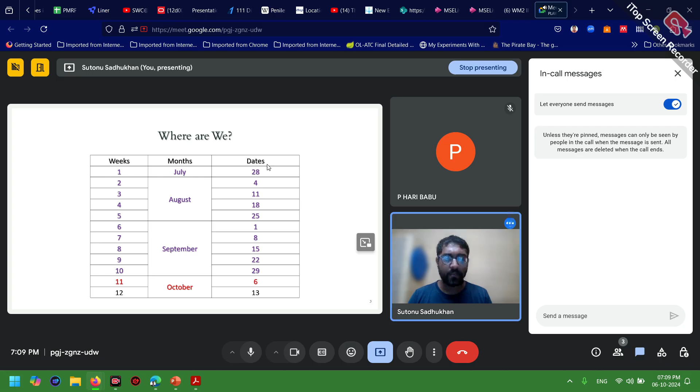So now, last class we actually showed you this quotation of a famous person who is a stand-up comedian of USA. His name is George Carlin. He says, 'Never underestimate the power of stupid people in a large group.'

Why did we say that? We actually used the quotation to clarify one statement which was given by an MP of the Hooghly parliamentary constituency of the state of West Bengal, which means member of parliament. She made a statement on the quantity of liquid water, but due to the ignorance of the people, they didn't have any idea that liquid property also should have mass, right? So not only does liquid have volume, liquid also has mass.

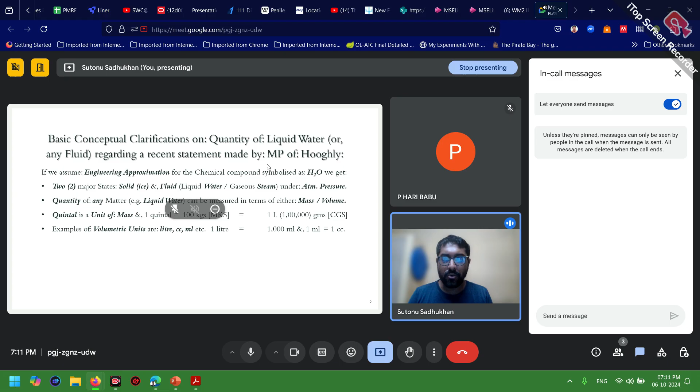Mass is a more fundamental property of any state of matter, irrespective of its state, be it a solid or a fluid. So any quantity of matter can be measured in terms of mass or volume. Not only is the quantity of liquid measured in liters, but it can also be measured in terms of mass. That was discussed in the last class. This is a very basic fundamental concept, but people have forgotten it. That's why they mocked that person, though whatever statements she made were perfectly scientifically correct.

So the volumetric units may be liter, cc or ml, but mass units can be expressed in terms of tons, kgs, grams or quintals. Quintal is a perfectly scientifically correct unit to measure the mass of any liquid like water, which is our case. We can also say that the density and volume of a fluid change with respect to temperature and pressure, but the mass remains constant irrespective of temperature and pressure.

So though the major market practice is to express the quantity in volumes, because the manufacturing company that manufactures the bottles keeps the bottle sizes constant, it is very convenient for them to express the quantity in liters. But that doesn't mean it cannot be measured in terms of mass, like the unit quintal.

We also clarified the difference between volumetric flow rates, which is nothing but Q, and static quantities like volume or mass. So the volumetric flow rate or mass flow rate, and the volume or mass, these two are rates, and the static properties are different. You can express the quantity in any one of them as per your convenience, as per your engineering application.

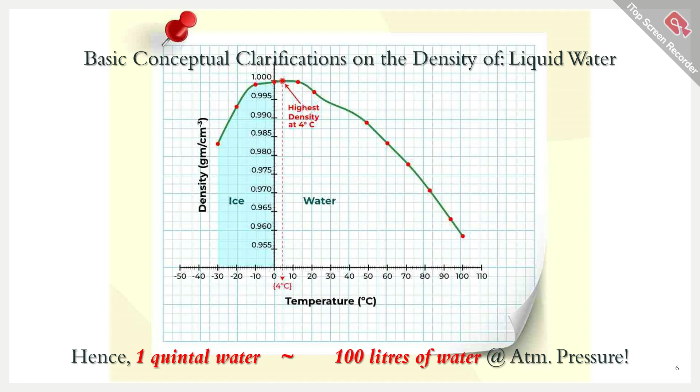Now, 1 quintal of water is equivalent to 100 liters of water at atmospheric pressure, that we have proved. And hence the statement made by that person was 100% scientifically correct, as we have shown.

So two problems were discussed in the previous class based on Manning's formula. Manning's formula requires a terminology written as m or R suffix H, called the hydraulic radius. It is a matter of pride for a teacher like me that students are very attentive in class, and in the last class, one student identified a major mistake in the slide for the calculation of hydraulic radius. One problem was perfectly fine, but the other had certain problems in the calculation of hydraulic radius.

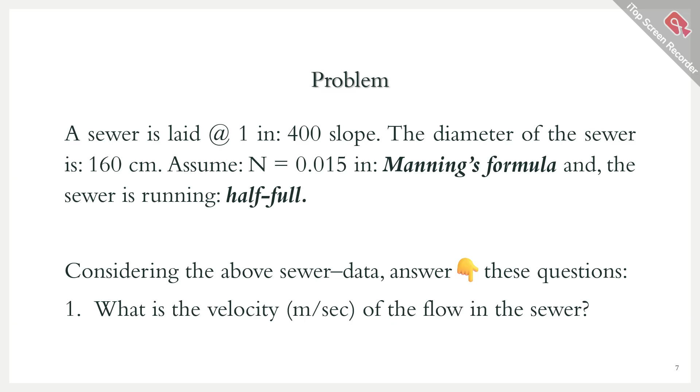So we will rediscuss that problem with the correct solution in today's class. Today's class starts with this problem discussed in the last class with certain mistakes. The problem was: a sewer is laid at a slope of 1 by 400. The diameter of the sewer is 160 centimeters. Assuming n, the coefficient in Manning's formula, is 0.015, and the sewer is running half full, considering the above sewer data, we had to answer: what is the velocity of flow in the sewer in meters per second?

So the data given is diameter is 160 centimeters, that means 1.6 meters, which implies radius is 0.8 meters, half of the diameter, and slope I was given as 1 by 400. Manning's formula is given as V equals m to the power 2 by 3 into root over of I, whole divided by capital N. Capital N's value is given as 0.015, which we put in the formula. Next, small m is the hydraulic radius, defined as the wetted area by wetted perimeter.

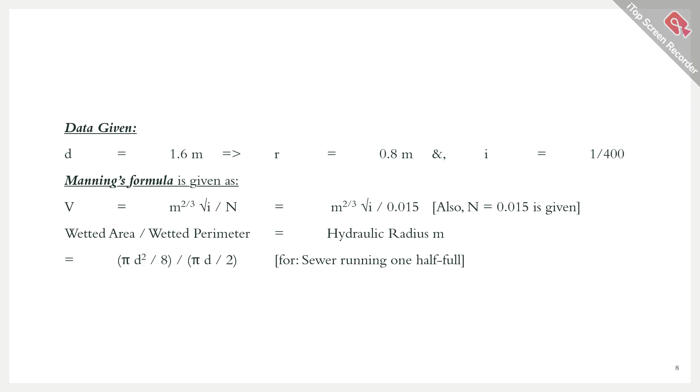So for a sewer running half full, we made a mistake by assuming the entire perimeter to measure the wetted perimeter. The value of wetted area was correct in our previous problem, which is pi r squared, that means pi d squared by 4, divided by 2, because the pipe is half full, so we take half of the entire cross-sectional area as the wetted area. That was correct, but in calculating wetted perimeter there was a problem, which one student correctly identified. When calculating the wetted perimeter, you should not consider the perimeter not in touch with the pipe. We had considered the diameter as part of the wetted perimeter, but it should not be, because the diameter, that is the top surface of the wetted area, does not touch the sewer pipe's internal wall.

Only half of the circular perimeter touches. That half is the perimeter where the water touches the inner wall of the pipe. But here the water does not touch the full inner wall, so we don't consider the diameter part. We only consider this half portion, which is 2 pi r by 2, that means pi r, or pi d by 2. So wetted area is pi d squared by 8, and wetted perimeter is pi d by 2.

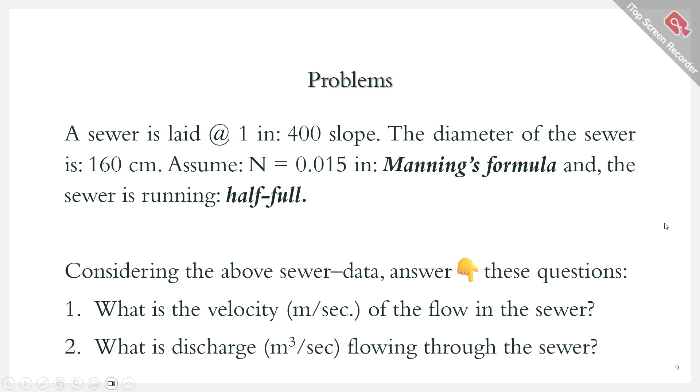Now, based on this velocity, we have to determine the discharge flowing through the sewer in meter cube per second unit. Meter cube per second means cubic unit. Okay, 1 cubic meter approximately equals 35.315 cubic feet per second.

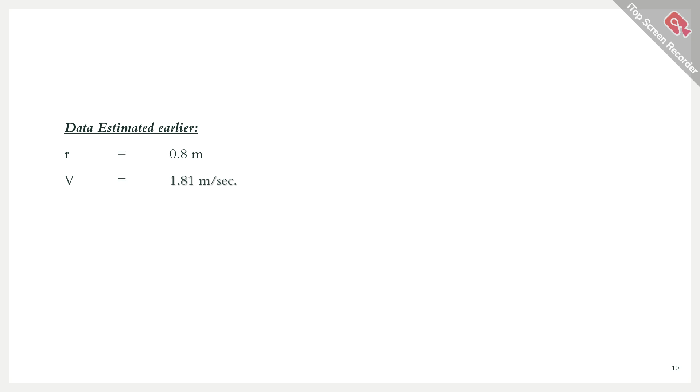Now, the data estimated earlier was small r radius equals 0.8 meter, and velocity was determined to be 1.81 meter per second from Manning's formula. Based on that, we get the solution where they've asked for the volumetric rate of discharge. If they asked about mass rate of discharge, we could get values in gram per second, kg per second, quintal per second, or tons per second, whichever asked. But they have not asked here, they only asked the volumetric rate of discharge, so that's why we are calculating it.

So Q, the volumetric discharge, is nothing but the wetted area into velocity. Wetted area means the portion of the area through which the fluid is flowing. In our case, it is half of the entire area, into the velocity with which the fluid is flowing perpendicular to the plane of paper. So wetted area is the total cross sectional area divided by 2, because it is half full, into velocity v that we just calculated.

So capital A means pi r square divided by 2, into v. Now pi into r square means 0.8 square means 0.64, divided by 2. This many meter square into velocity means 1.81 meter per second. After simplification, it will give you meter cube per second, that is cubic, which equals approximately 1.82 meter cube per second, the correct answer of the problem we discussed in our last class.

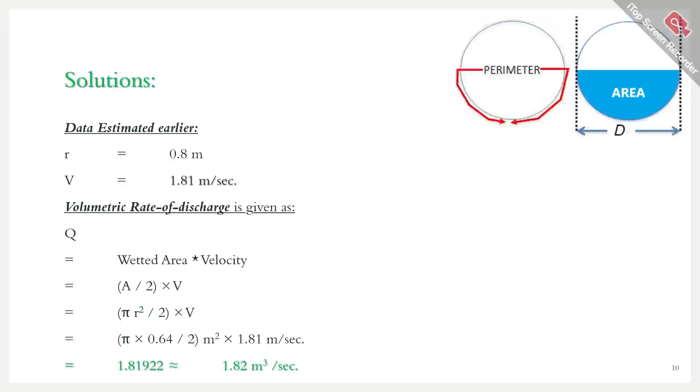Okay, two problems we discussed. The first problem had some issue because of the calculation of hydraulic radius, but the second problem was fine. So next today we'll start with an MSQ, multiple select question, so more than one option may or may not be correct.

So the potential of the maximum retention of rainfall through infiltration is independent of: characteristics of soil, vegetation and land usage; antecedent soil moisture conditions; quantity of rainfall; duration of rainfall. These are the four options, so one or more may be correct. Think and give the correct options, type it in the chat box. I'll wait for 1 minute.

Okay, so yeah, try this out. Okay, so not able to answer. Okay, we'll move on to the solution.

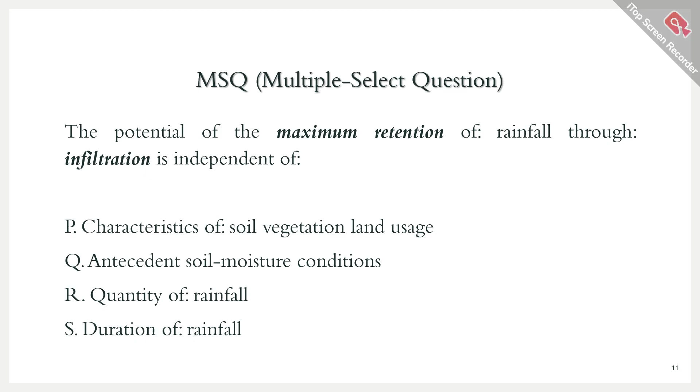Now the answers are option R and option S. So quantity of rainfall and duration of rainfall both actually do not affect the maximum retention of rainfall through infiltration. The retention depends on the characteristics of soil, vegetation, land usage, and antecedent soil moisture conditions. The first two options are the factors which affect the maximum retention of rainfall through infiltration.

P and Q are the answers for what affects it, since the question asks what the maximum retention of rainfall through infiltration is independent of. That means most probably you thought it means dependent on, and you answered that way. So maximum retention of rainfall through infiltration is dependent on options P and Q, but is independent of options R and S. R and S are the two factors which don't affect the parameter, the maximum retention, but P and Q are the parameters which affect it. Most probably you didn't understand the term independent of, that's why you got this answer, right?

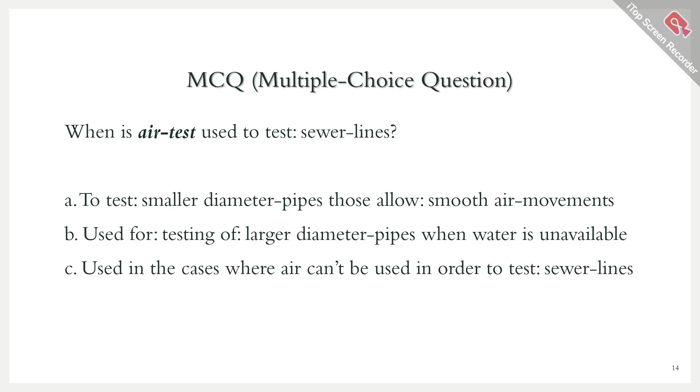So we'll move on to our next MCQ, multiple choice question, so one option will be correct. When air test is used to test sewer lines: Option A is to test smaller diameter pipes that allow smooth air movements. Option B is used for testing of large diameter pipes when water is unavailable. Option C is air test is used in cases where air cannot be used in order to test sewer lines. Option D is air test is used in regions with heavy backfilling.

So these are four application areas of air test. Three application areas are wrong, one application area is correct. So whichever is correct, you have to identify it and type in the chat box. Okay, I'll again wait for 1 minute.

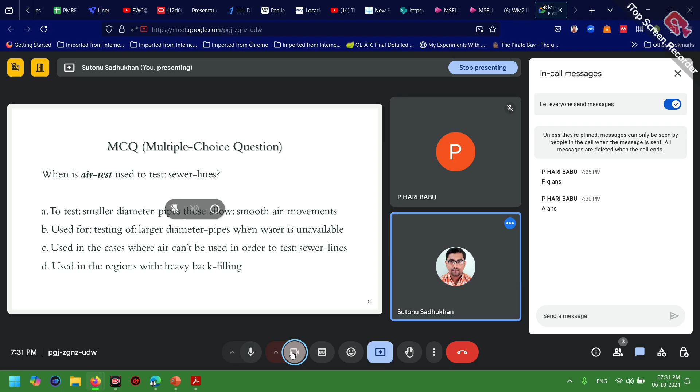Okay, not able to answer. You have given A as the answer.

We'll see the correct answer. So the correct answer is option B, not A. Air test is used for testing of large diameter pipes when water is unavailable.

Large diameter pipes are the sewer lines. It is not used to test small diameter pipes that allow smooth air movements. So if the air is in smooth movement, you cannot use air test to determine the usability of sewer lines. So option A is not correct.

Option B is correct. It is just a memory-based question. You have to just remember the answer. If you remember it, then it's correct. If you don't remember, then you have to guess.

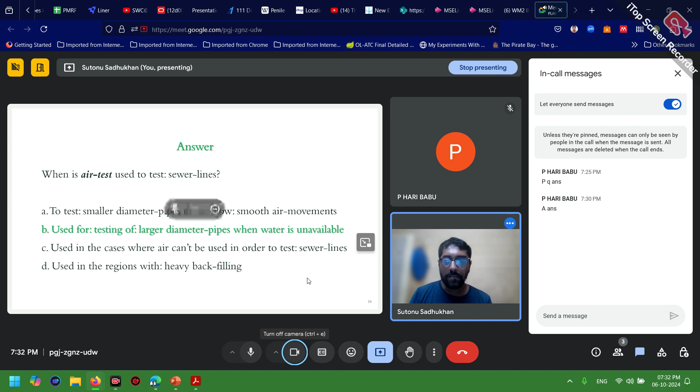That's all. So now next is an MSQ, a multiple select question. Again, more than one option may or may not be correct. Which one or which of the following statements is or are correct regarding the time area method for runoff estimations?

Option A is time area method transforms hyetographs from storm into runoffs. Option B, it cannot account for the temporal variations in rainfall intensities. Option C is time area method is based on the concepts of time area histograms, and option D is the time area method is an extension of the rational method.

Again a memory based question, but more than one options may or may not be correct. You have to think and type the correct options in the chat box. We'll wait for a couple of minutes in this time.

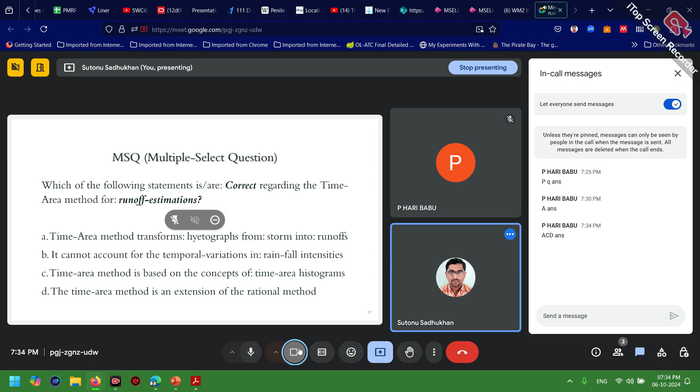A, C, D, you are telling as the answer. So we'll see. The correct answer are A, C, D. Yes, definitely, you are correct only.

Option A and C and D are correct options. And option B also you have to remember that the time area method can account for the temporal variations in rainfall intensities. So that's why option B was incorrect. Okay, all the properties of the time area method you can get through these options.

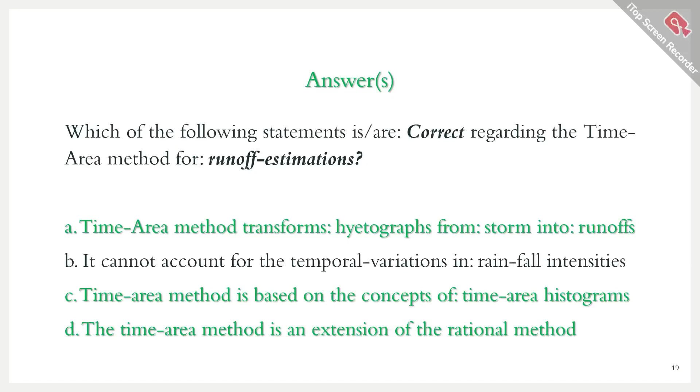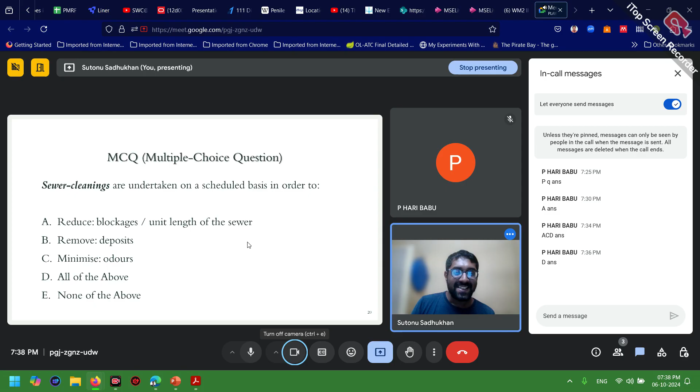Okay, you have given the answer as D. We'll see. One another option was there, none of the above. Sorry about that. So the correct answer is option D.

Yes, you have answered it correctly. All of the above are the objectives of sewer cleanings on a scheduled basis.

Now, next MCQ or multiple choice question is, what is SCS CN method used for? Option A to trap gases, option B to estimate the size of the sewers, option C is to estimate the surface runoff volumes for long durations, high intensity rainfalls, and option D is to estimate the limiting velocity.

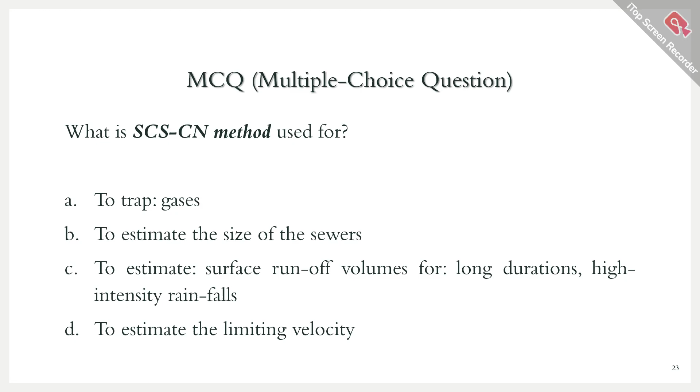Let me check whether any other option is there. Okay, another option is there, to design a sewerage network. So only one option will be correct also in this case regarding SCS CN method. I'll wait for 1 minute.

So what is this SCS CN method? It is basically soil conservation services. The term SCS means soil conservation services.

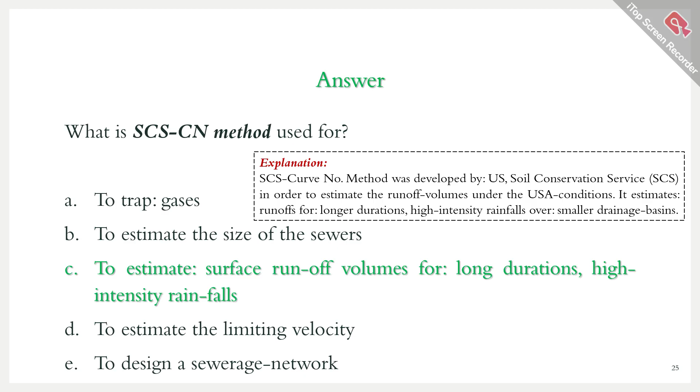It was a method developed by the US SCS department in order to estimate the runoff volumes under the American conditions. So this method estimates runoff for longer durations, high intensity rainfalls over smaller drainage basins. So option C is the correct answer, as you have correctly told.

Now next, there is a table. You have to match the following types of sewer cleaning equipments with their system characteristics. So sewer cleaning equipments are given in the left hand column. There are four types of equipments, namely Manila rope and cloth ball sectional sewer rods, sewer cleaning bucket machine, dredge.

Third option is flush bags, sewer scooters, and the fourth option is suction units, velocity cleaners. Now there are three types of cleaning system characteristics given in the right hand column, namely hydraulic systems, manual systems, and mechanical systems. Now you can see there are four types of equipments, but three types of cleaning system characteristics. So basically, one cleaning system characteristic will be repeated for two types of equipments.

So you can keep the left hand order as same, PQRS, and tell me the right hand order. It may be like 1 1 2 3, or 1 2 2 3, or it may be 1 2 3 3.

You have to state one of the cleaning system characteristic types twice in order to accommodate for all four types of equipment. In this way, you can tell me the correct chronological order from the right hand column. I will wait for a couple of minutes.

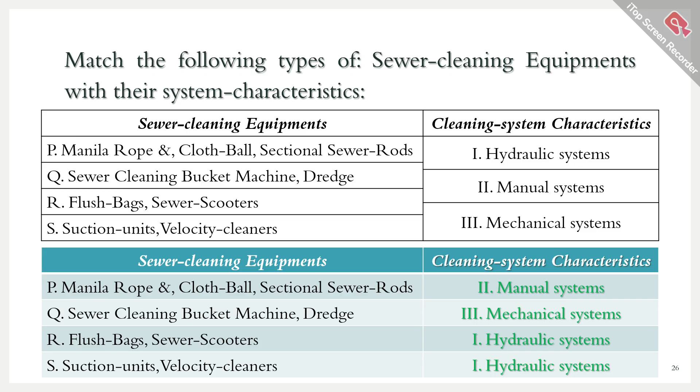So this machine, cleaning buckets, these things are your mechanical systems. If you just see the names it will be clear. The flush bags, flushing, where you have to use water jet velocity in order to clean something - these naturally come under hydraulic systems. And the leftover is your manual systems, where ropes, cloth balls - this cannot be mechanical, right? This will be manual, one have to use by hand. The sewer rods, rod means one have to just insert a rod and push something in order to clean something. So P goes with 2, Q goes with 3, and R and S both are 1.

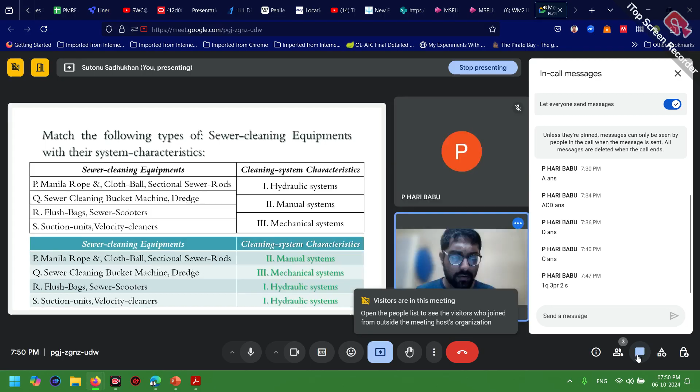Okay. What happened? Okay. So we'll move on to what, next problem.

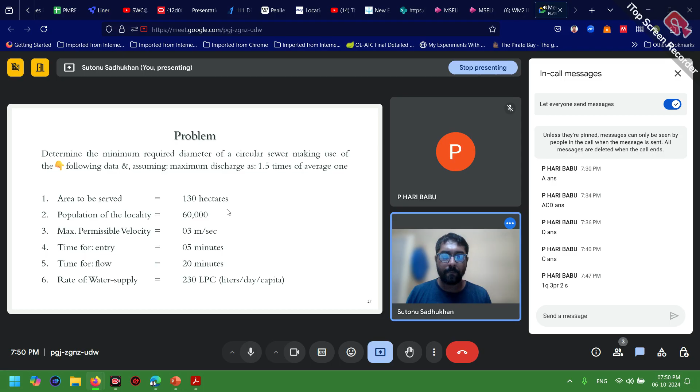Where you have to determine the minimum required diameter of a circular sewer, making use of the following data and assuming maximum discharge as 1.5 times of average one. Now the data is given as area to be served is 130 hectares, population of the locality is given as 60,000, maximum permissible velocity is given as 3 meter per second, time of entry is given as 5 minutes, time for flow is given as 20 minutes, rate of water supply is given as 230 LPC, that is liters per day per capita. Now the last assumption is impermeability factor is given as 0.45.

Based on the data, you have to calculate. This is not a very easy problem. You have to remember the formula and all.

I'll wait for 2 minutes for you to think in a certain direction. Even if you are not able to solve this problem, it's okay, but at least I'll give you some time to think. After that, when you will solve, you can check through the solution procedure whether you have thought it in the correct direction or not. That's why we'll wait for a couple of minutes before proceeding with the solution.

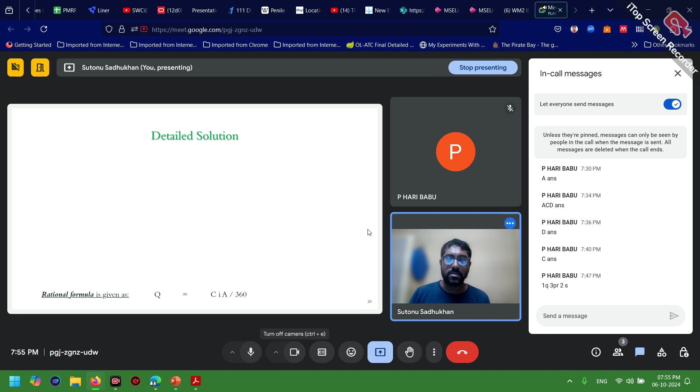Okay, so we can proceed with the solution, I guess. Before proceeding with the detailed solution, we have to remember one thing, that is the rational formula. Rational formula is given as Q equals to CIA by 360. So this formula you have to remember. But even if conceptually, you can also remember this formula.

How? So here you can see that we have to ultimately calculate the required diameter. So in order to get the diameter, we have to get the volumetric flow rate. Now after that we will divide the volumetric flow rate with the velocity, and after doing that we will get the surface area. As it is your circular sewer pipe, if we know the surface area we can easily determine the diameter, because area is a function of diameter. The formula is pi d squared by 4. Easy enough.

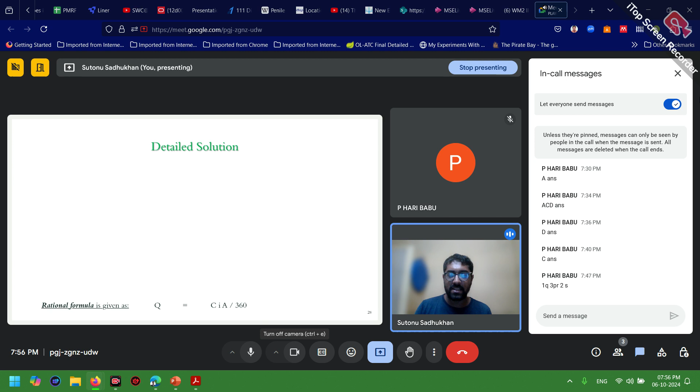That's why we are remembering the rational formula, because rational formula here, Q or volumetric discharge flow rate in cusec or cumec, whatever it is given. So what is basically this CIA thing? The C is one factor, it is given as the impermeability factor 0.45. The I is your precipitation rate, and A is the area. So while solving this problem we'll see why the 360 factor came into the picture. So first you have to remember this formula, keeping this formula in mind we'll proceed.

So first, the explanation goes like this way. Quantity of water supply is given as 60,000 into 230. So what is this 230? 230 is nothing but your liters per day per capita. So to convert it into liters, we are first multiplying it with 60,000, which is the population, which gives you liters per day. Then again we will multiply with 1 day, which will give you the liters.

So 60,000 into 230 liters per capita, that means this many liters per day. Now, if you want to convert it into liters per second, you have to divide it with 86,400 seconds in 24 hours, that means 1 day, which gives you, after simplification, approximately 160 liters per second.

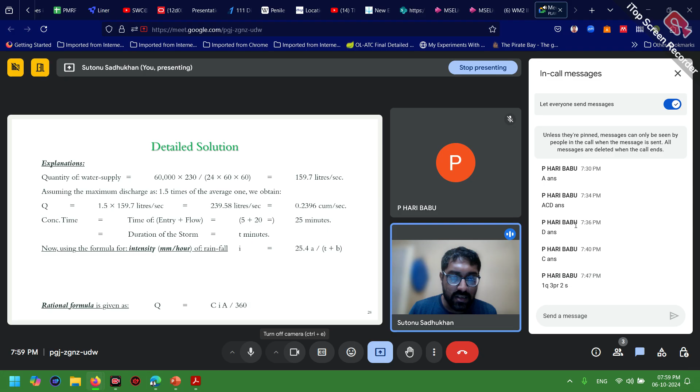So what are these A and B? A and B are coefficients. This 25.4A divided by small t, which we have calculated from the concentration time to be 25, plus b.

A is 30 and B is 10 when the range of small t is 5 to 20 minutes. Now, if the range of t is 20 to 100 minutes, which is our case, 25 lies in between 20 and 100 minutes. So that's why within the formula for intensity, the value of A and B will be 40 and 20.

After putting those values of A and B, we get the value of intensity as 25.4 into 40 divided by 25 plus 20, that means 45. So 40 by 45 means how much? That gives you 8 by 9. So if we multiply this factor 25.4 with the factor 8 by 9, we will get the intensity as 22.6 millimeter per hour.

Now this I value we have to put here. Okay, now why did this factor 360 come into the picture? You can see here the value is given in millimeters per hour, and here the value is liters per second. So some unit conversion is taking place, to keep a parity between these two. That's why basically this factor 360 came into the picture, just because of the unit conversion.

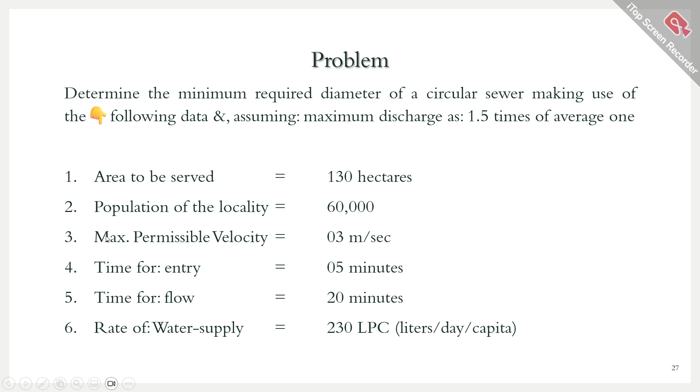Now if you look earlier, you will see that the maximum permissible velocity is given as 3 meter per second, point number 3. That's why we got the V value to be 3. So 3.91 by 3 equals 1.303 meters squared.

This is the area. Therefore, the diameter of this sewer D will be equals to root under of 4A by pi. This many meters. How are we getting that?

So area is nothing but pi d squared by 4. So this 4 came into the numerator on the other side and we divided it with pi. So d squared equals 4A by pi. Now d equals root under 4A by pi meter. Hopefully you are understanding this formula.

So which is nothing but equals to the area value we just put here. Then 4 into this, 1.3, that means 5.2. So 5.2 by pi, and to the power half, that means the square root of the entire thing gives you 1.3 meter approximately.

So the solution will be approximately 1.3 meters in rounded figure, which is nothing but the minimum diameter required for this sewer. Hopefully this is clear to you. If you have any question on the problem, you can ask, otherwise we will proceed to the next problem. Just go through this once again, then we will proceed.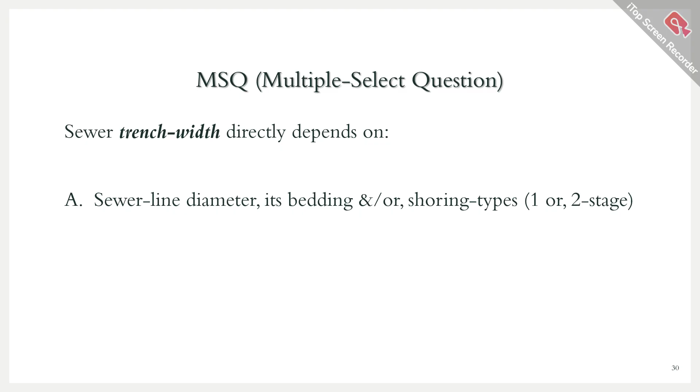Our next MSQ, multiple select question, where more than one option may or may not be correct: sewer trench width directly depends on Option A, sewer line diameter, its bedding and or shoring types, 1 or 2 stage. Option B, working space required inside the trench and the type of ground and soil below the surface. Option C, adjoining services and or nearby structures. Option D, length and or slope of the sewer. These are the 4 options upon which the sewer trench width directly depends.

Again, it's a memory based question where more than one option may or may not be correct. So try this one out, I'll wait for 1 minute.

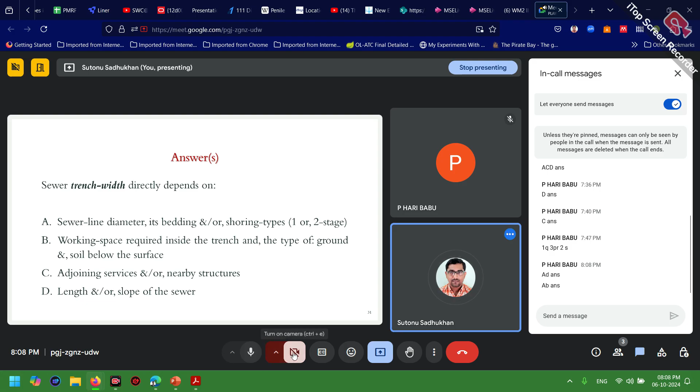You see, the correct answers are: width of the trench depends on sewer line diameter and its bedding, type of shoring, single stage or double stage; working space required inside the trench, type of soil and ground below the surface; adjoining services and nearby structure. You have given A and B as the answers. C is also another answer.

Yes, D is not an answer. Length and or slope of the sewer is not a factor on which the trench width depends. Width of the trench does not depend on the length and or slope of the sewer, but it does depend on adjoining services or nearby structures. So C is also another correct option, but A and B you have identified correctly.

Okay, thank you for your participation. Now we'll move on to our next MCQ, multiple choice question, where one option will be correct.

What is meant by return of a storm event? Option A, average recurrence interval between storm events is greater than equals to a specified value. Option B, duration of a storm. Option C, time taken by storm water in order to return to the rivers or lakes. Option D, time required for the rain falling on the most remote points of a catchment in order to flow across the ground surfaces along the drains.

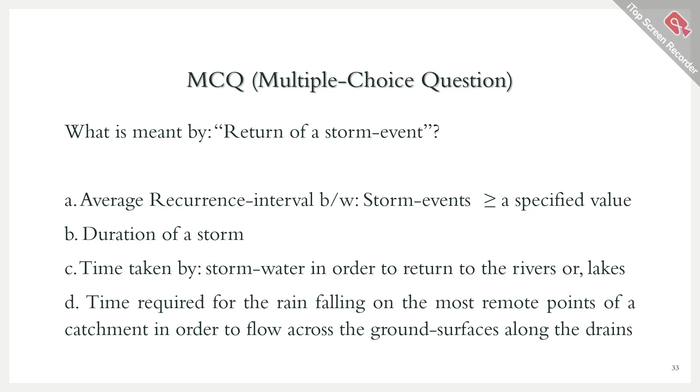So return of a storm event, there are four options, all different timings. Option B is the duration of the storm. Option C is the time taken for storm water to return to the rivers or lakes. Option D is time required for rain falling on the most remote points of a catchment to flow across the ground surfaces along the drains. And option A is also another time, but it is an interval, average recurrence interval between storm events which is greater than equals to a specific value.

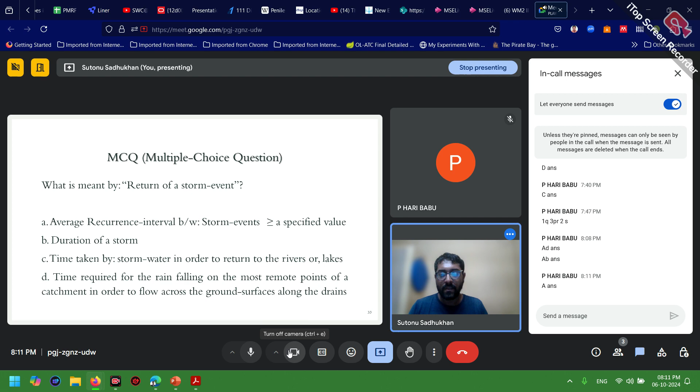Which one is the correct definition of the return of a storm event? Which type of time is the correct option? You are telling us A as the correct option, okay we'll see. Yes, option A is the correct option. You have identified it correctly.

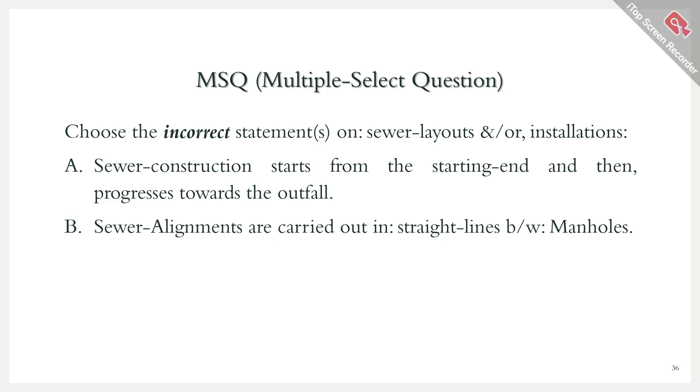Now we'll move on to our next MSQ, or multiple select question. More than one option may or may not be correct again. You have to choose the incorrect statements on sewer layouts and or sewer installations. Option A, sewer construction starts from the starting end and then progresses towards the outfall. Option B, sewer alignments are carried out in straight lines between manholes. Option C, dewatering trenches are required for the placement of concrete bedding and laying of pipe sewers and or construction of concrete and or brick sewer till curing. Option D, horizontal sewer layouts determine hydraulic carrying capacities.

Big options, I'll give you a couple of minutes.

Which ones are the incorrect statements on sewer layouts or installations? That you have to think.

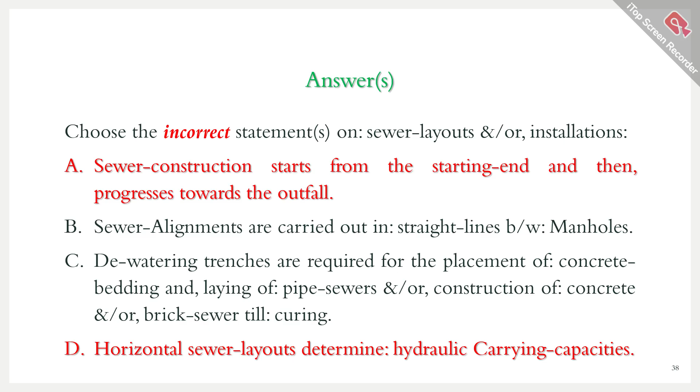Now, sewer alignments are carried out in straight lines between manholes. Between two manholes, sewers will be in a straight line. It's a correct option, okay. Whereas horizontal sewer layouts don't determine hydraulic carrying capacity, so that is one incorrect option. A, you have identified it correctly - it is incorrect - but instead of B, it will be D.

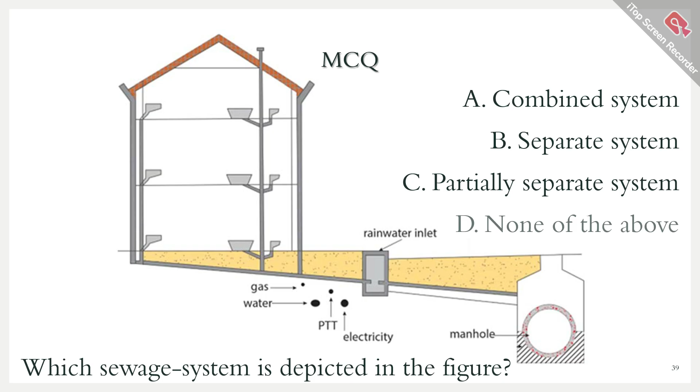Which sewage system is depicted in the figure? That you have to identify. Do you need options for this? Okay, so option A is combined system, option B is separate system, option C partially separate system, and option D is none of the above.

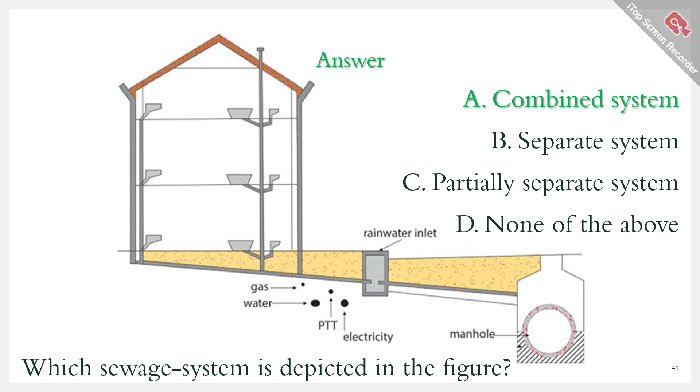So the answer is option A, it is a combined system. You can say there are rainwater inlets also, there are manholes also. So electricity supply is also there. That's why, due to the presence of all of it, it is a combined system. There is no separation, neither partially nor full.

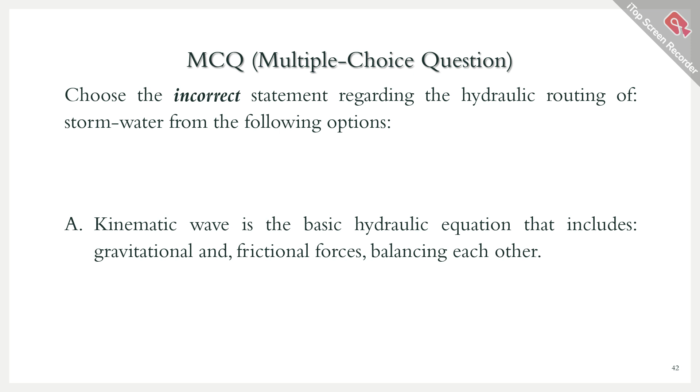Now we'll move on to our next MCQ. You have to choose the incorrect statement regarding the hydraulic routing of storm water from the following options. Option A is kinematic wave is the basic hydraulic equation that includes gravitational and frictional forces balancing each other. Option B is diffusion wave routing equation incorporates pressure forces only. Option C is dynamic wave equation considers all terms of momentum equation, and option D is inertial and pressure forces negligibly affect kinematic wave motion. Regarding the hydraulic routing of storm water, three options will be correct, one option will be incorrect, so the incorrect option you have to identify.

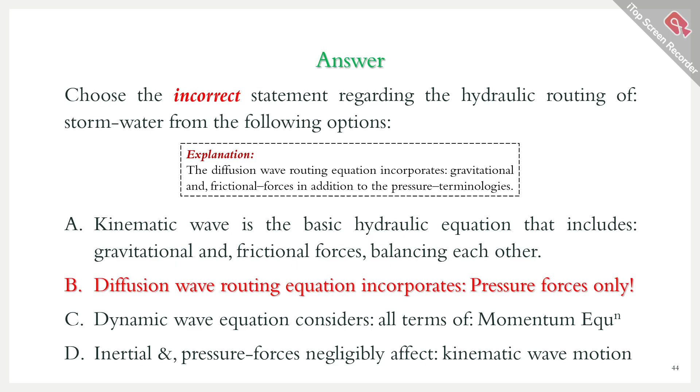So the incorrect statement is B. Diffusion wave routing equation does not incorporate pressure forces only. All of the other options are correct, including option D. Why, we will see that. The diffusion wave routing equation incorporates gravitational and frictional forces in addition to pressure. That's why option B is incorrect. Inertial and pressure forces do negligibly affect the kinematic wave motion, so that's why D is the correct option. B is incorrect, okay.

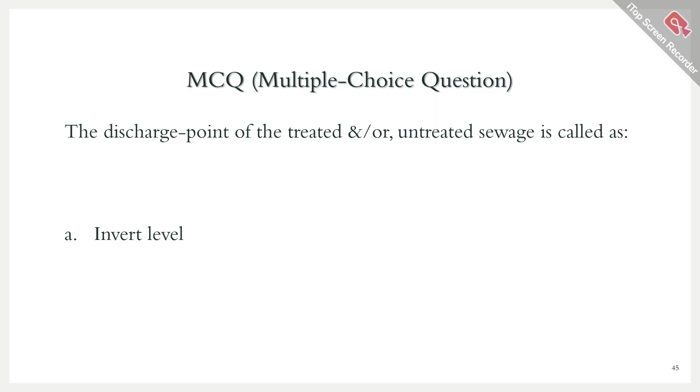Now next MCQ is, the discharge point of the treated and or untreated sewage is called as: option A invert level, option B night soil, option C outfall, and option D decomposed sewage.

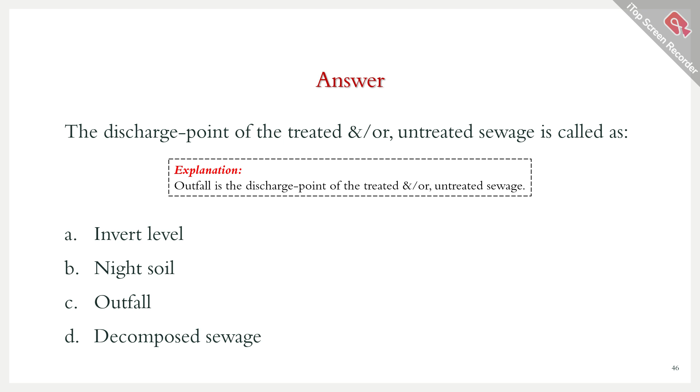Night soil is something from when there was no proper sanitation system in villages and all. There was a collection pot at the bottom of the sanitary latrines, so there the feces fall, and the next morning the people in that trade actually used to collect those things. This is called night soil. It is not a discharge point. So the discharge point is called the outfall, of the treated and or untreated sewage, okay.

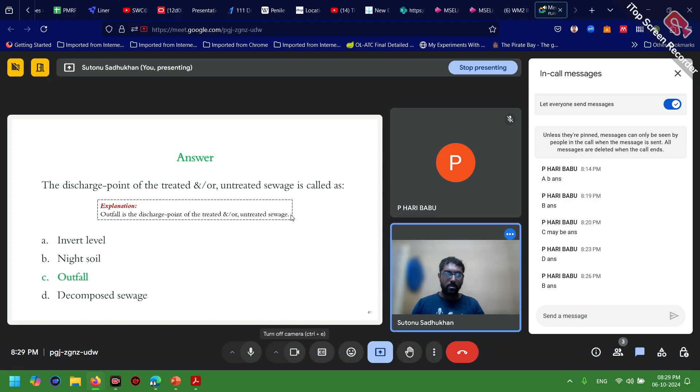Okay, so yeah, also try again this one. Okay, you are telling no, you are not yet able to answer this. Okay, we'll see. Should we wait for a couple more minutes, or okay, let's proceed with the answer.

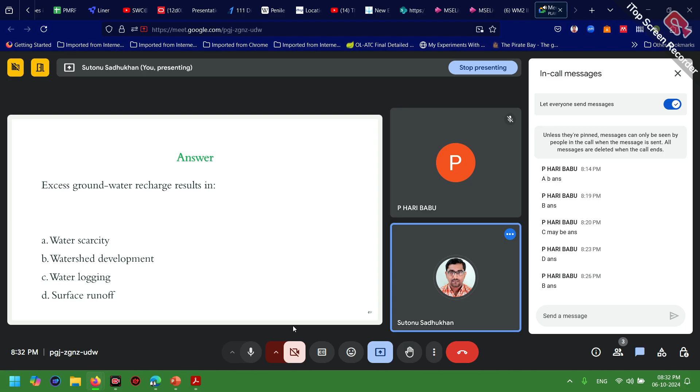So now, yeah, water logging is the answer. Excess groundwater recharge results in water logging. Water scarcity cannot occur, since water scarcity is due to the lack of water, so excess groundwater recharge will not cause water scarcity. Watershed development is a surface phenomenon, it will not occur inside the ground. And surface runoff is not due to excess groundwater recharge, it occurs because of the rainfall. So option C is the correct answer.

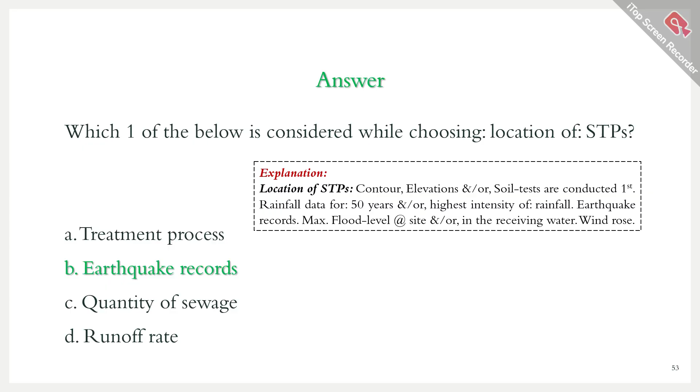Quantity of sewage is something definitely related with the design of the sewage treatment plants. But while the matter comes into choosing the location of STPs, then earthquake records becomes important.

Treatment processes, quantity of sewage, runoff rate, these are all design aspects. But earthquake records is something related to the choice of location of the STP or sewage treatment plant.

Next MCQ is: which one among the below does not relate to the need for artificial recharge? Option A, rainwater harvesting. Option B, groundwater depletion. Option C, seawater intrusion. And option D is geogenic contamination.

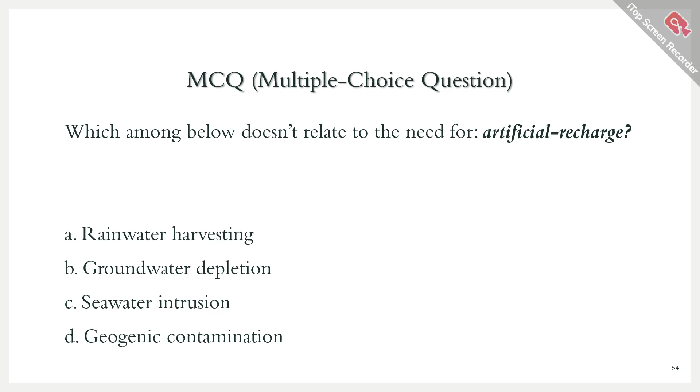Which one among the below does not relate to the need for artificial recharge? Artificial recharge is not related to which one of the four options? So three options will be related to artificial recharge, right?

Okay, you're telling option A as the answer.

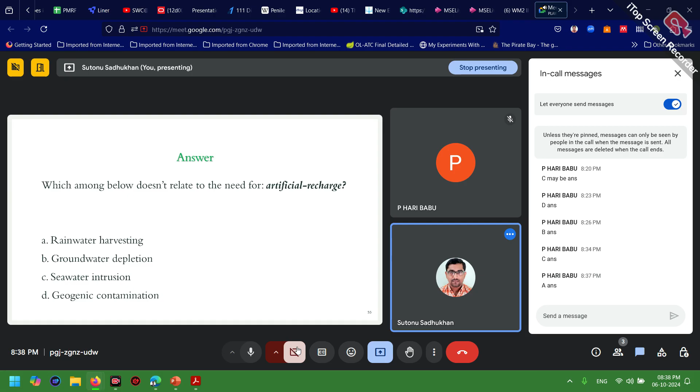So yeah, rainwater harvesting - this one is correct. Rainwater harvesting is something that doesn't relate to the artificial recharge.

All of the other three things, like groundwater depletion, will require groundwater recharge, artificial groundwater recharge by human intervention. Then seawater intrusion, geogenic contamination, all of them require artificial recharge, whereas rainwater harvesting does not relate to the need for artificial recharge. Now next, there is a multiple select question.

Which of the following statements is or are false with regards to STPs or sewage treatment plants?

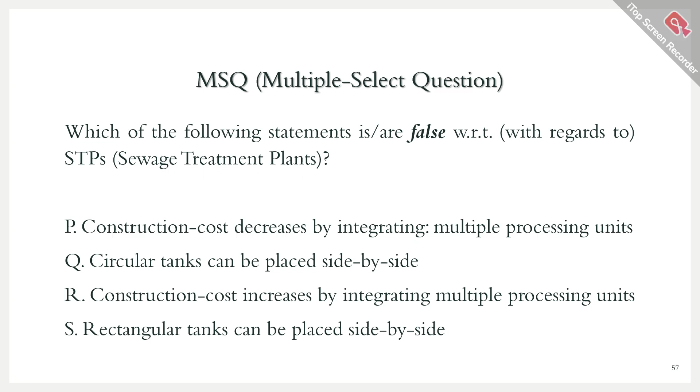First option is construction cost decreases by integrating multiple sewage processing units. Second option is circular tanks can be placed side by side. Third option is construction cost increases by integrating multiple processing units. And last option is rectangular tanks can be placed side by side.

So whether circular tanks or rectangular tanks can be placed side by side, that you have to determine, and whether construction cost increases or decreases by integrating multiple sewage processing units, that you have to determine. So either option Q or S will be correct, or between option P and R, one option will be correct.

That's all. Two options, I believe, in this question should be correct. So the other two will be false, that you have to determine with regards to sewage treatment plants. Q and R. Okay.

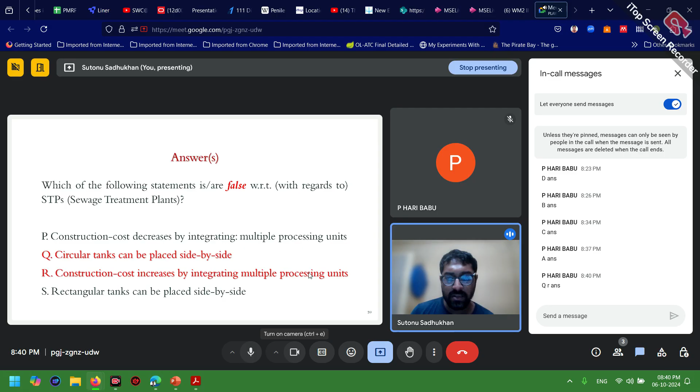So the answer is basically the false statements you have to determine. Q and R are indeed false statements. So rectangular tanks can be placed side by side, and construction cost decreases by integrating multiple processing units. So P and S are correct options, Q and R are false. Okay, yeah, you have determined it correctly.

Now next is column matching. So how do you have to match the factors? Those are provided in the left hand column, considered while planning for artificial recharge, with their right hand column description. So factors are climates, topographies, and hydrogeologic conditions.

And the descriptions are: the factor determines the extent of runoff and retentions. Option 2 is determine the occurrences of potential aquifer systems, and number 3, the factor determines the spatial and temporal water availability for recharge. So which factor goes with which description?

You can keep PQR as same, and you can tell me the correct order of 1, 2, 3. So R goes with 3, then Q with 1 and P with 2, that you are telling.

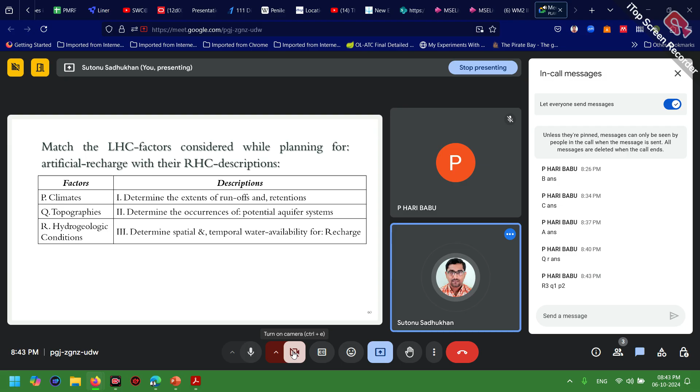We'll see. So the correct description is 3, 1 and 2, you are telling.

No, so R goes with 2, not 3. Q with 1 and P with... okay. So Q you have identified correctly. R to Q3, P1, yeah.

So no, it is again wrong. So previously you identified Q correctly. Okay. Secondly, you identified R correctly, but again P got messed up. Okay, so we'll see.

Climates determine spatial and temporal variation of water availability for recharge. Topographies determine the extent of runoffs and retentions, and hydrogeologic conditions determine the occurrences of potential aquifer systems. So PQR with 312, this is the correct option.

Okay, it's okay, just you. This is also again a memory-based question. So if you have watched the lectures, you can identify them correctly. Otherwise, you have to revise that all before the final exam.

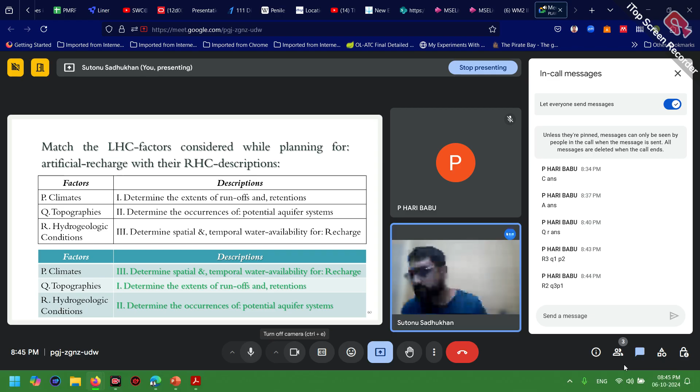Okay. So the next is MCQ, or multiple choice question.

In the self-purification method of sewage treatment, which one of the following takes place in the recovery zone? Option A, active decomposition. Option B, anaerobic decomposition. Option C, stabilization of organic matter. And option D is decomposition of solid matter. Okay.

So one option will be correct. Self-purification method of sewage treatment in the recovery zone - which one of the following four options is true with respect to that?

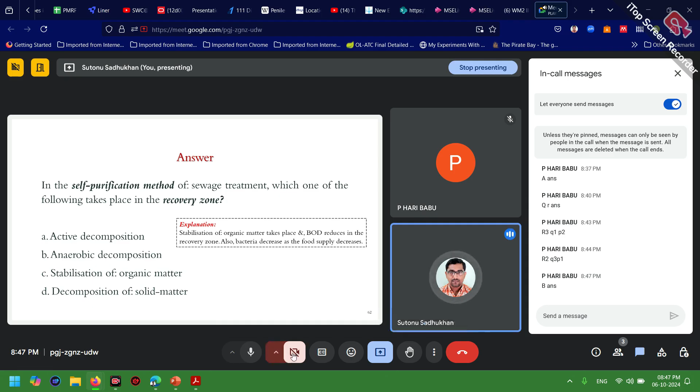So you have given the answer as B, anaerobic decomposition. We'll see. The answer is: stabilization of organic matter takes place and BOD reduces in the recovery zone. Also, bacteria decrease as the food supply decreases. We have already clarified the concept of BOD, biochemical or biological oxygen demand, in one of our previous classes. We have also solved a problem based on BOD to further clarify your concept.

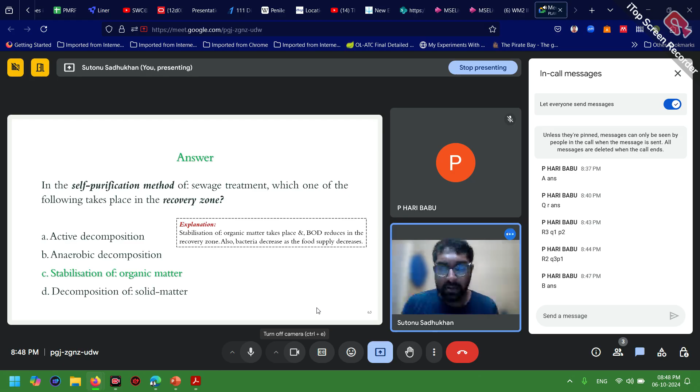So I thought it would be helpful for you. Option C, stabilization of organic matter, is the correct option in this case. B is not correct - anaerobic decomposition is not, because BOD is related with active decomposition, decomposition in presence of oxygen. So it cannot be anaerobic. If oxygen is present, that means air is definitely getting mixed with the water, with its splashing and all. So that's why option C is the correct answer.

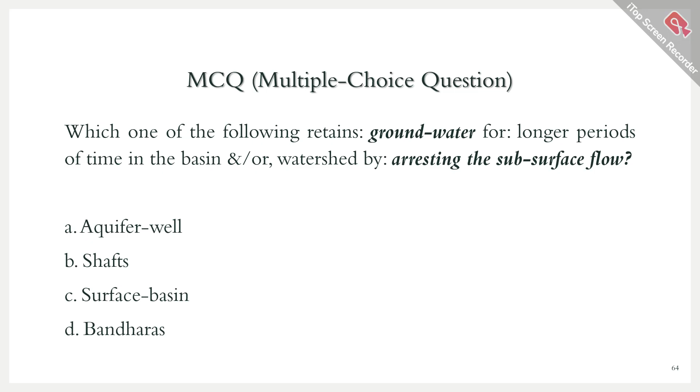Now, next MCQ is: which one of the following retains groundwater for longer periods of time in the basin and watershed by arresting the subsurface flow? Option A, aquifer well. Option B, shafts. Option C, surface basin. Option D, bandhara. Which one of them retains groundwater for longer period of time in basin and watershed by arresting subsurface flow?

Subsurface flow is flow that is happening underground. Now, one of these structures basically restricts that flow, and in this way it can retain the groundwater for longer period of time in basin or watershed. We'll wait for a couple of minutes.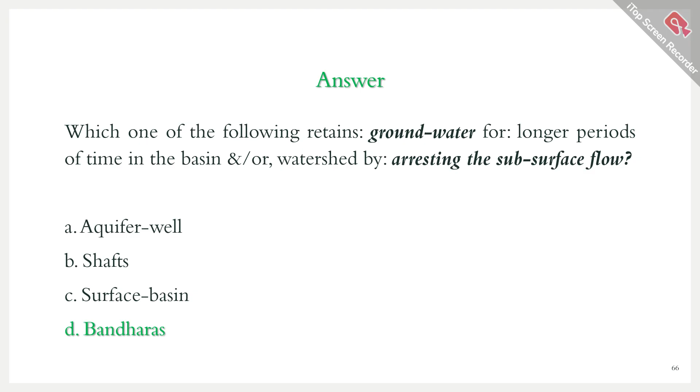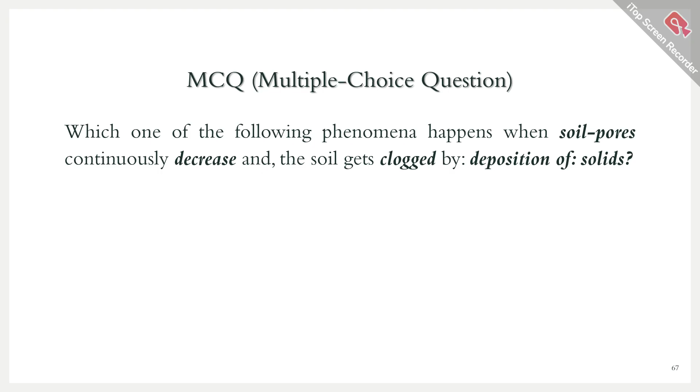Now, the next MCQ is: which one of the following phenomena happens when soil pores continuously decrease and the soil gets clogged by deposition of solids? Option A, sewage sickness. Option B, sewage farming. Option C, flooding. Option D, surface sewage logging.

One option will be correct. Which one of the following phenomena happens when soil pores continuously decrease and the soil gets clogged by deposition of solids? This phenomenon is termed as sewage sickness, sewage farming, flooding, or surface sewage logging.

Again, you are telling option D as the answer, right? Surface sewage logging, you are telling, but it is sewage sickness. Again, it's a memory based question. The definition of sewage sickness is something like this that you have to remember. It is not surface sewage logging, because it is inside, right? It is not happening at the surface level. Soil pores get decreased inside the soil, and the soil gets clogged.

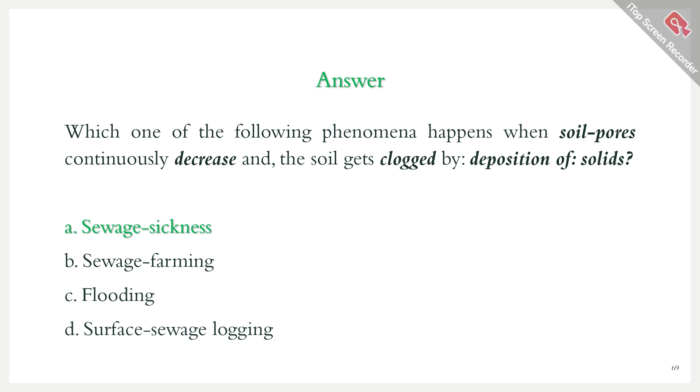There is no clog that is being observed on the surface, like in the trenches or canals or any other waterways, like lumens and all. There, the clogging is not being observed. The clogging is happening inside the soil because of the decrease of soil pores and the deposition of solids. So that's why it is called sewage sickness.

Now next, you have to match the following illustrations with their respective recharge techniques and choose the correct sets from the options. Okay, so the options are as follows. Where is it? Where is it not coming?

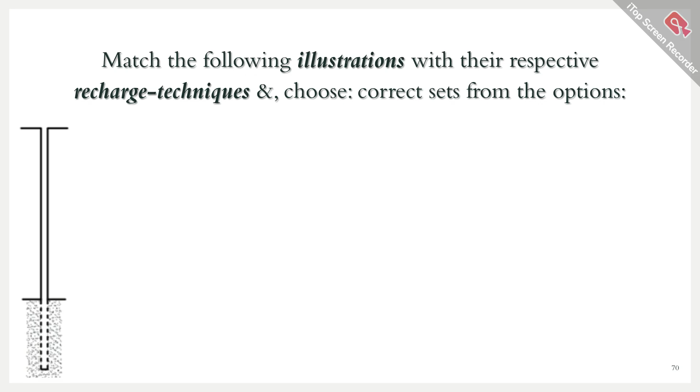So the illustrations are given this way - these three illustrations or pictures, and the options are trench, aquifer well, and excavated basin. You just take a notepad and write these three options there. Trench, aquifer well, and excavated basin - note down these three options. One is trench, another is aquifer well, another is excavated basin.

Now next, I have numbered the illustrations as 1, 2, 3. You have to tell which one is trench, which one is aquifer well, and which one is excavated basin. AW for aquifer well and EB for excavated basin. One, this; two, this; three, this - in this way you can write. So one is trench, another is EB, another is AW.

So this one I have numbered as 1. This one I have numbered as 2. This one I have numbered as 3. So one is trench, another is aquifer well, another is excavated basin, and these are their numbers. I'll wait for a couple of minutes.

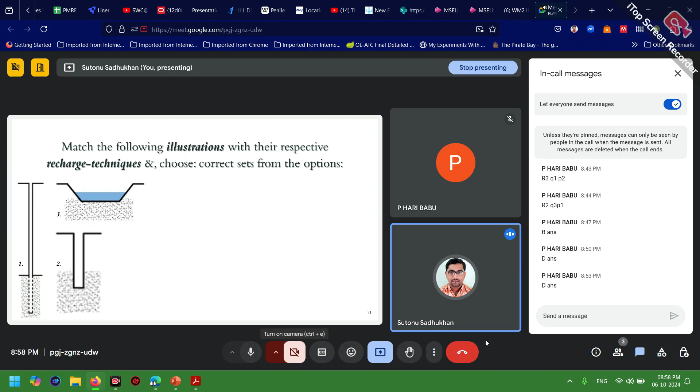Trench, in local terminology, is called porikha. It was drawn when kings wanted to protect their forts from enemy attack. If you've seen the movie Jack the Giant Slayer, you might have seen these kinds of trenches. So you should be able to answer which one is the trench.

One is excavated basin, two is trench, three is aquifer well. I don't think so, I think option three is the trench. Okay, trench in cross section looks like this. Number one is aquifer well, not excavated basin. So this one is the excavated basin.

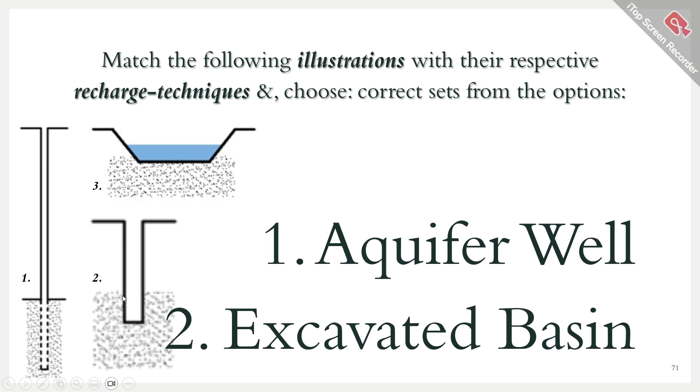It is very common to confuse the aquifer well and excavated basin, which look almost similar. But in case of aquifer, you are trying to extract water from the soil, so within your excavation there are pores. Through these pores, water from the soil will rise through the aquifer well. But in excavated basin, subsoil pores are not present at the surface, because the idea is not to collect water the way an aquifer well does. So option two is the excavated basin.

Now option three, I wanted you to answer this one correctly. So option three is the trench.

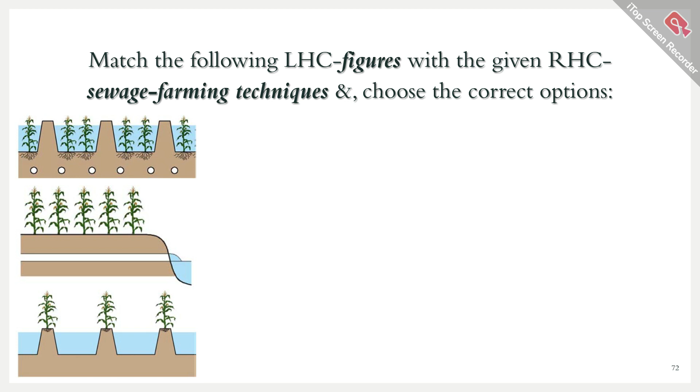Okay, no issue. So today's last question: you have to match the following left hand column figures with the given right hand column sewage farming techniques, and choose the correct options. Three different figures are given, and the options are: number one subsoil irrigation, number two ridge and furrow, number three flooding. Keep the left hand order the same and tell me the correct order of the right hand side.

So it is 1, 2, 3 currently. You tell me the correct order after rearranging. This is the last question of today's session. So right hand side is 1, 2, 3 - whether it will remain as is or change. The order will change, that's only for you to tell.